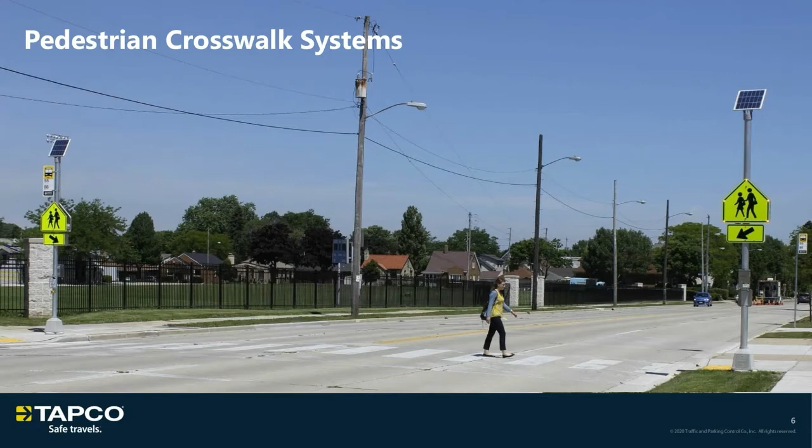To achieve this, we have many solutions. For the warning device piece of this, we offer traditional beacons in whatever configuration you prefer, blinker signs, which are LED edge-lit signs, or RRFBs, otherwise known as rectangular rapid flashing beacons. I found that Virginia and Maryland tend to favor the RRFBs as the go-to solution, while DC offers a tiered approach, starting with single-sided blinker signs, then going to double-sided RRFBs when the crossing is higher speeds or needs the extra attention. Each state really differs in their preferred warning method.

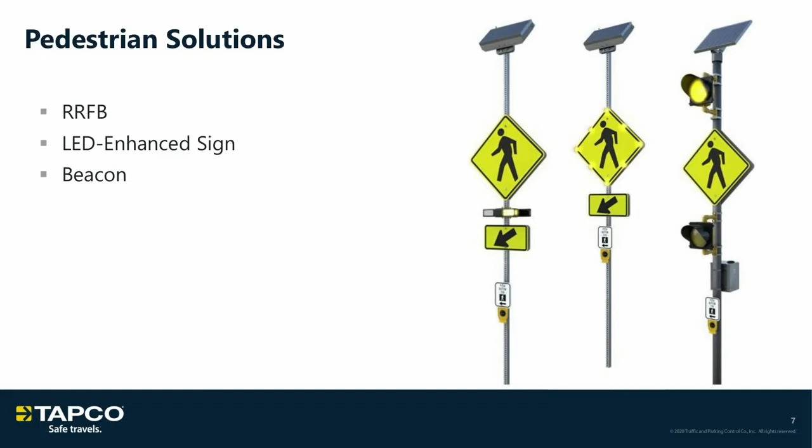As I mentioned, RRFBs tend to be the favored device, partially because of the attention-grabbing flash pattern. These have been proven to show yield rates by as much as 90%, are used nationwide, and meet the MUTCD interim approval IA21. They're required to be double-sided to create a gating effect for any two-way road. They are also required to be pedestrian activated, whether that be by a push button or passively.

Our TAPCO RRFB is dimmable so that it's bright enough to draw drivers' attention during the day, but not blinding them at night. It has an articulating bracket that allows you to perfectly aim the LEDs toward traffic. It's also easy to install in that we have put pedestrian indicator lights on both sides, along with pop-off covers so there's no worry about having it installed upside down and having the indicator pointing the wrong way.

TAPCO's blinker signs are MUTCD compliant. They're also dimmable for best effect for day-night conditions. This solution does not require it to be double-sided, so depending on solar size needed, it can be a lower cost solution. In studies, the blinker signs have proven to slow drivers down by 53%.

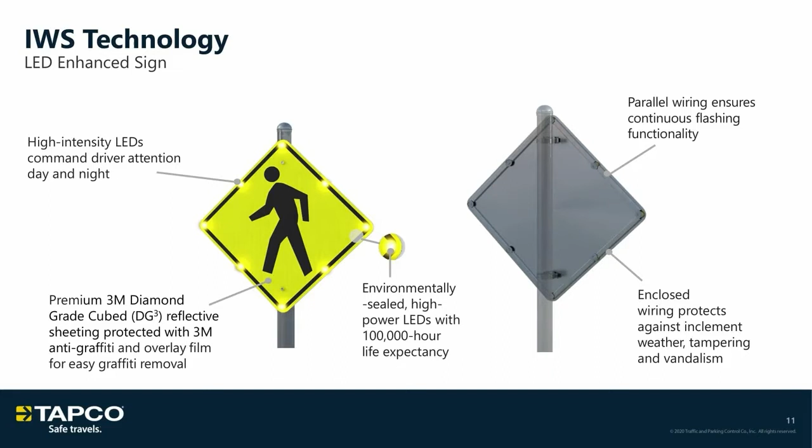Next, we come to flashing beacons. While these are most popular with school zone solutions and warning devices such as intersection ahead signs, etc., we still see quite a few of these paired with pedestrian crossings. They're MUTCD compliant and available in many configurations.

With the blinker beacons, we offer many different configurations, as I mentioned. They come in a single version, dual vertical, dual horizontal, or double-sided of any of these options. We also offer them in an 8-inch or 12-inch size, and also black and yellow housing. Our LEDs have a life expectancy of 100,000 hours and are the highest quality.

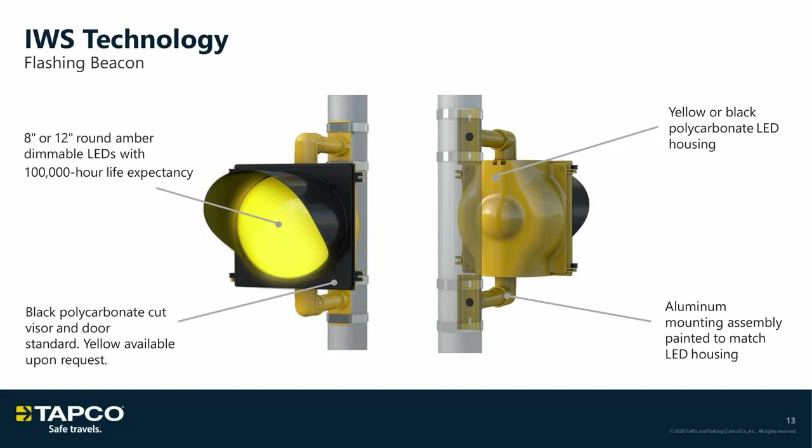Next, we'll go on to our activation types. After you've decided on the warning device, we have many activation types to choose from. I'll go over some of our most popular. They include the Bulldog push button, the INX or IDX push buttons, the Guardian push button bollards, wireless walk-through bollards, and FLIR passive detection.

The Bulldog push button is the most budget-friendly and has a light and chirping noise. This one is most commonly used with push button bollards as it has a low power draw.

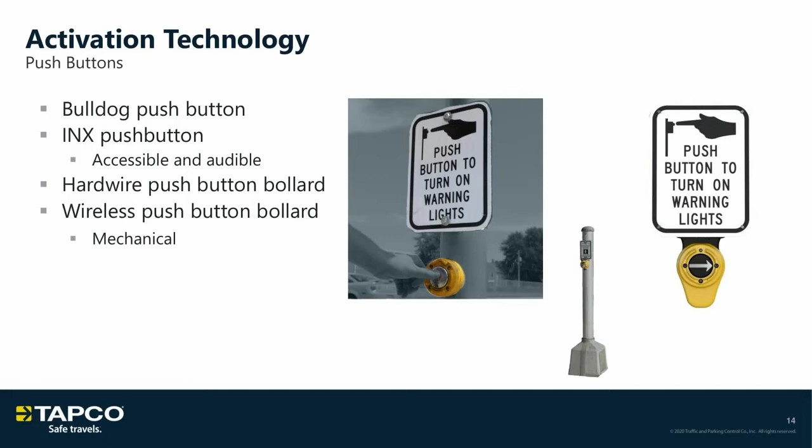The newest version of the MUTCD is pointing people towards using an APS button. We offer a few different APS buttons to choose from. One is the INX button by Polara. This button is replacing the XAV button as it's very similar except has some additional features. When this button is pushed, it has an audible message saying yellow lights are flashing, although on the Polara app, multiple commonly used messages are preloaded for your convenience. The button is able to be programmed via Bluetooth.

There's also another option, which is the IDX button, which is very similar, but you're able to either wave or press the button for touchless activation.

Jim will now tell us a little bit more about the Guardian push button and then go into FLIR thermal passive detection. So we're a partner with Campbell Company here in the Mid-Atlantic, so we have a lot of customers that use the Campbell APS. We like to use Campbell's APS where we can on RRFB systems and other crosswalks.

So what you see there is a picture of the Campbell APS Guardian, and it comes as a standard 5x7. In the upper right-hand corner, you can see that little plastic man logo sign. You can put the sign right on the APS, or in the upper left-hand corner that has a 9x12 sign plate, or you can have a 9x15 sign plate. There's also telescopic brackets available in 3 different sizes, which helps you get the push button away from the pole to help meet ADA requirements.

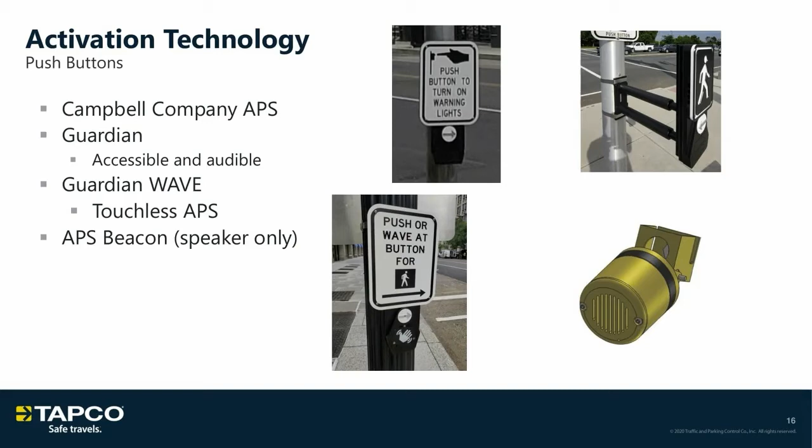Another popular way to activate these systems is with passive detection. A lot of agencies put in crosswalk treatments and then find out a month or two later that people aren't pressing the push button, so it doesn't do a whole lot of good. It's a good idea to decide early on to add passive detection, so there's a greater likelihood your treatment will be activated and you get the intended response from the motorist.

The system uses heat signatures and detects cyclists and pedestrians moving toward the crosswalk. It's not susceptible to shadows, tree shadows, road glare, or anything that could be problematic with other optical style cameras. The system is Wi-Fi configurable, and there are different ways to activate it — let me talk about that on the next slide.

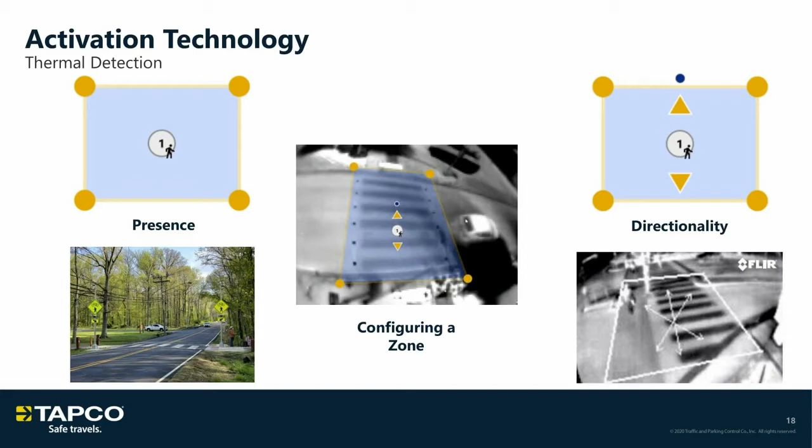Next we'll talk about our walk-through bollards. These use dual infrared beams, and once the beam is broken, it radios over to the warning device to flash. They can be either hardwired or battery operated, and they're great for bike trails since you can offset them a little ways back to flash the crossing ahead of time before the biker actually reaches it.

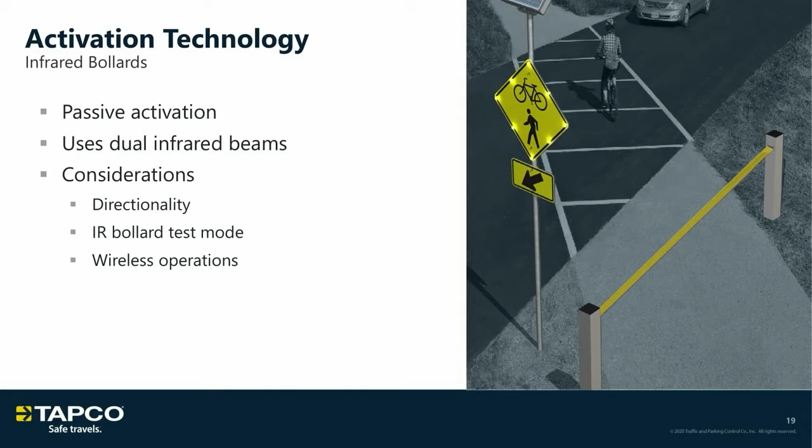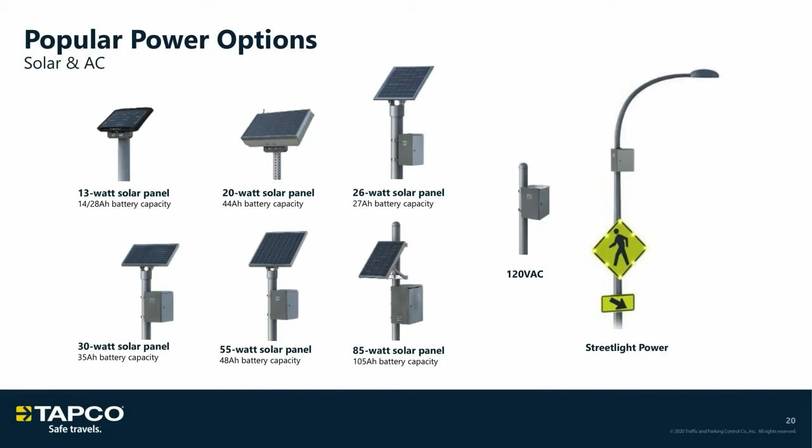So how do you know what solar size to use? There are many options giving different levels of autonomy. One TAPCO advantage is that any municipality or DOT can give us their desired autonomy requirements, and we can build the system to meet those. In DC, for instance, they want all RRFBs to run for 30 days minimum without sun, and we're able to easily meet that requirement using an oversized solar panel.

Jim, if you want to go ahead and add some of your insights in there. Sure. Yeah, we can hear you. Sure, you can hear me this time.

Okay, good. Okay, so

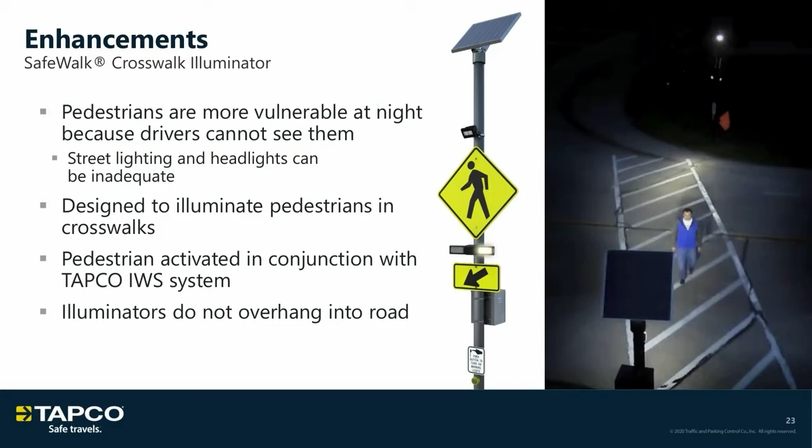The SafeWalk illuminator is unobtrusive, has a two light section to maximize its effectiveness, and is adjustable. It exceeds the FHWA's recommendation of 20 lux and is designed to illuminate one lane of traffic per device. So it's optimal to have two SafeWalks for a 2-lane road, one on each pole. The SafeWalk has a photo cell, so it's only activated when the warning device is activated and it's dark outside.

One thing to be mindful of is if the device is in a highly shaded area, it may be tricked into thinking it's dark and come on during the day. This device can be added to new or existing systems. You'd want to be mindful that there's enough power if it's solar. It pairs most commonly with the 55-watt system.

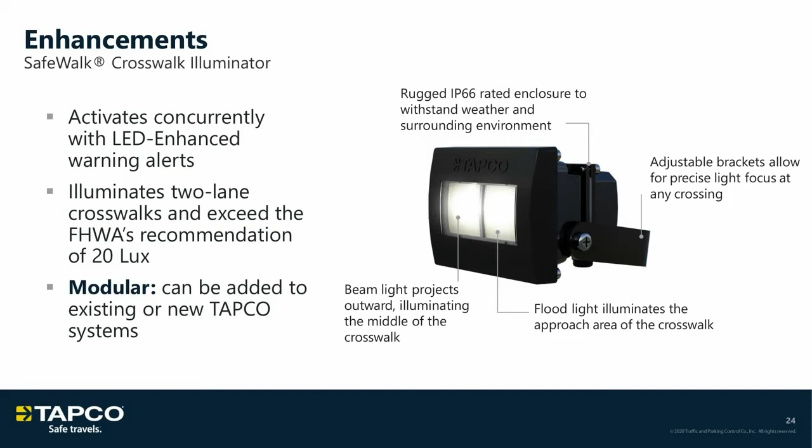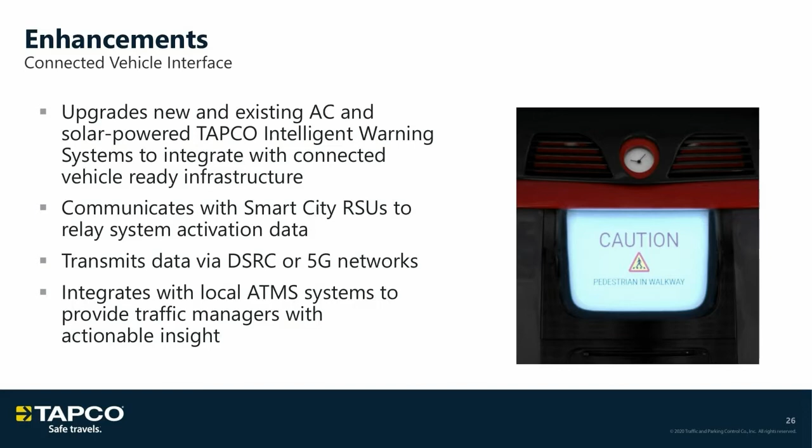The roadside unit has direct short-range communication to connected vehicles in the area. It also has GPS time and location. When a connected vehicle is traveling through the CVI and a TAPCO system is activated, it sends a message such as pedestrian ahead to connected vehicles close by to give that driver added warning.

further. Sounds good. Yeah, no problem. We can hear you, Jim. You got a problem before. All right, great.

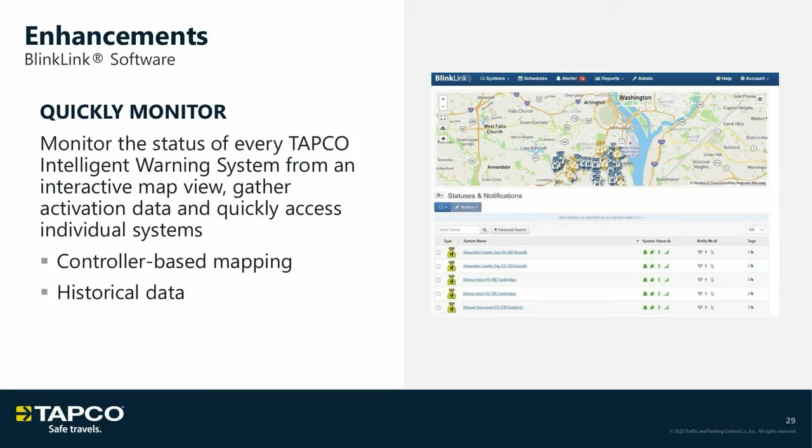So you can have snow days or closures and 2-hour delays ready to go. And if you wake up that morning and the school board has said it's a 2-hour delay, somebody from the agency can just log in and quickly program all the school's clocks to be on a 2-hour delay, so that when the students are out there 2 hours later, they get the benefit of the beacons warning motorists to slow down during school hours.

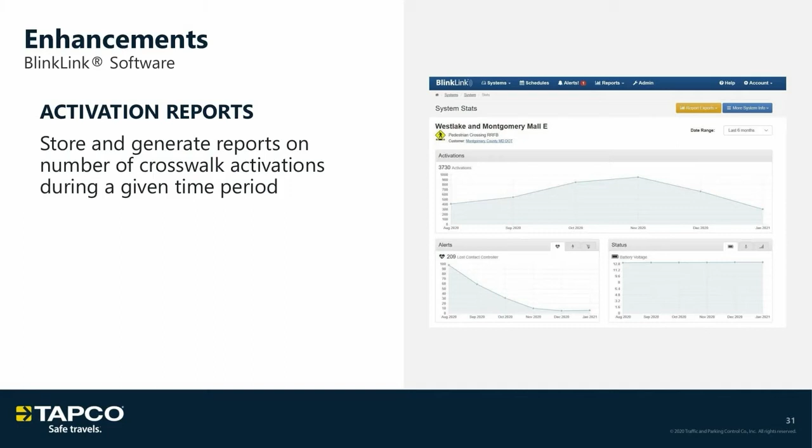There's other types of data that can be looked at. You can see the history of the battery voltage, the history of the temperature of the unit, when it may have lost contact. And another application could be alerts.

So you can have technicians that are assigned to certain crosswalks or certain school zones. And if there is an alert like low battery, indicating you've got a problem with the battery or the solar power, before the unit actually dies it will send you an email basically saying, come check me out, I've got a problem. That could be an email alert or a text message, or both, to whatever technician might be assigned to that location.

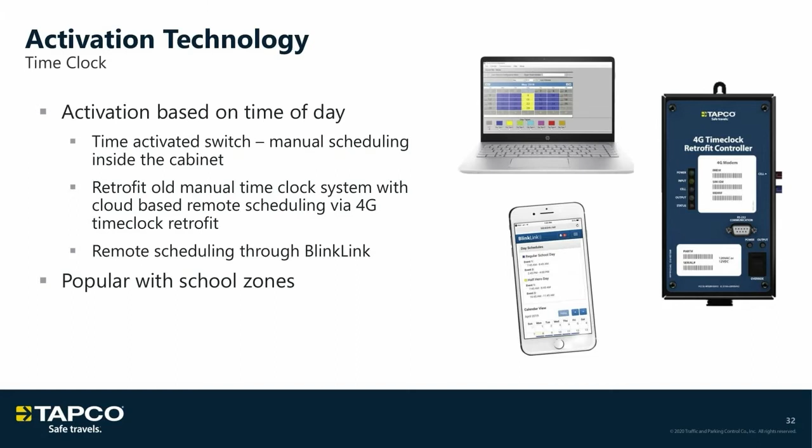Solutions to meet your needs. Probably the most popular would be the dual vertical beacons, although we also see requests for dual horizontal beacons or school zone signs with embedded 8-inch beacons set in the sign. We also offer school zone blinker signs as well as combos of either school speed limit blinker signs paired with radar feedback signs, or blinker beacons paired with school speed limit signs and radar feedbacks. These options provide the ultimate in awareness.

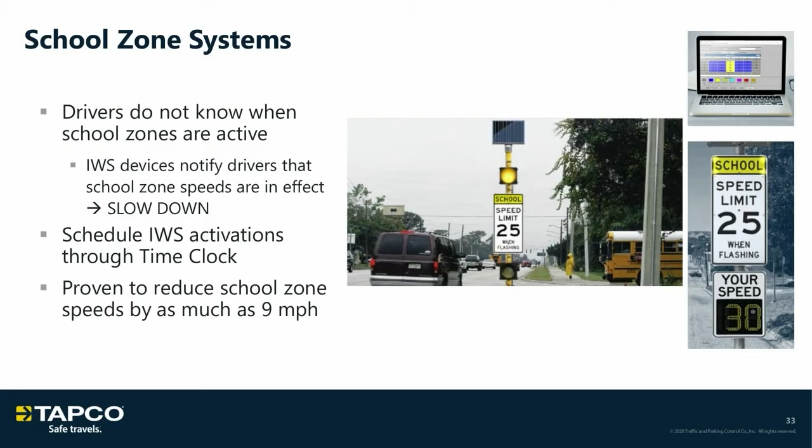We also offer a wide variety of radar feedback sign options on their own. You have the option of getting them with white, yellow, fluorescent yellow green, or work zone orange colored faces. We offer either the Evolution or Safe Pace series. The Evolution line comes with 1 year of free cloud for data management of your signs. The cloud does have a yearly fee, but you're able to cancel at any time and still be able to use the Bluetooth function to collect data. These signs come in a wide variety of power options. AC is great for those areas that already have power and plan to have the sign be permanent.

I see the battery powered option most commonly used by police departments wanting to move the sign around. The batteries are rechargeable, and depending on how much is activated, could have about a 2-week life before needing to be recharged. Then we also carry the solar option.

All of these signs come with a violator strobe alert, which can be programmed to go off at certain speeds. We have options for standard or full matrix models if you want custom messages such as slow down or too fast. There's one strategically placed on my way to work that catches me daydreaming every once in a while. It is a real attention grabber.

Jim, do you want to add anything else to this and then talk about some of our unique configurations?

Yeah, sure. So it's funny with these driver feedback signs, one thing you can definitely do is limit the speed that's posted on the sign, because apparently some people will try to go through the sign and get a high score. So you can turn it off at 65 or 70, or whatever the high speed might be, so people don't try to do that.

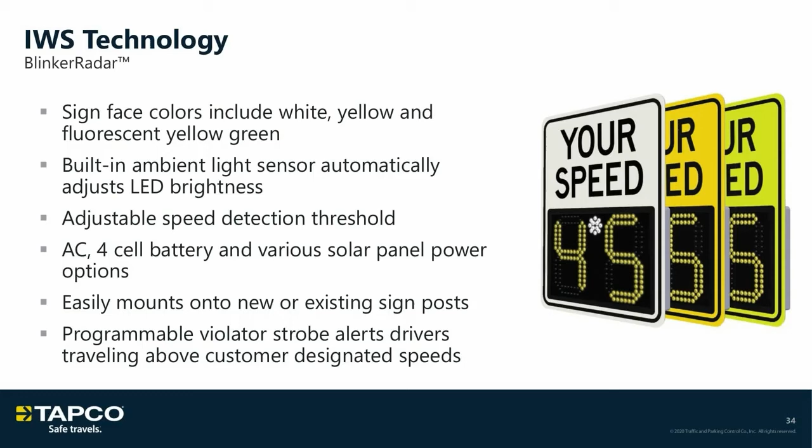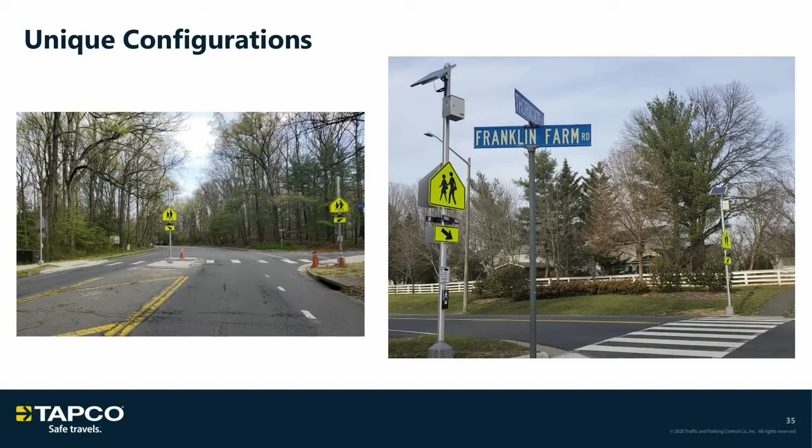The examples you see here, on the right and on the left, the idea with the RFBs is to create a gating effect for the driver. You should see the beacons on both the right and left side of the roadway. On a bidirectional roadway with no median, you'd see one on either side of the street. If there's a median and a third pole, then each edge of the roadway might have just one RFB that faces traffic, and the median pole would be bidirectional, which still creates that gating effect. Both of these happen to be in school zone areas, so we can use that S1-1 school zone sign as well.

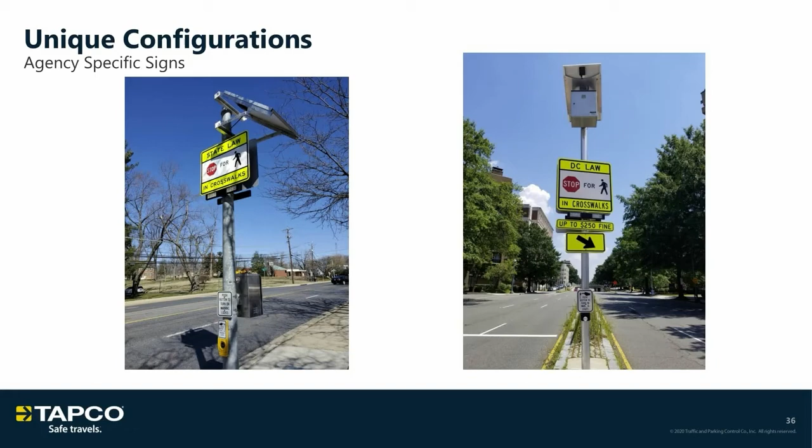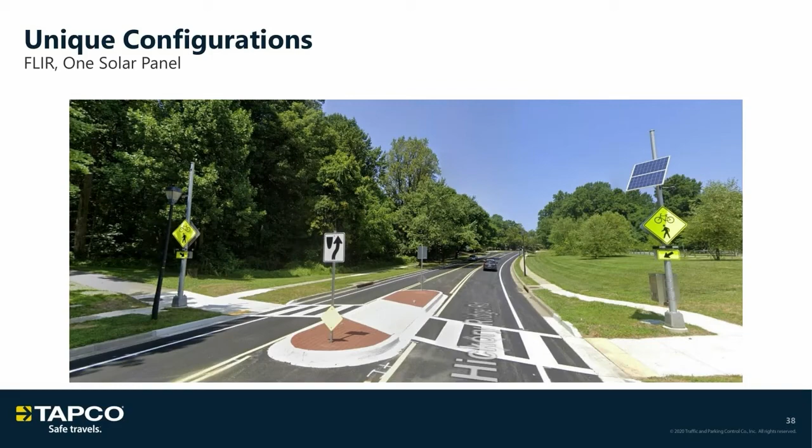And this is on the Capital Crescent Trail, pretty heavily used. In this case, there's no push button to activate the system. They're using the FLIR passive detector to activate the system on the curbside. The system will activate for 20 seconds or whatever the duration was set to. The other thing about this crosswalk is that the APS beacon is used, the speaker, so that it enunciates yellow lights are flashing, wait for gap, to the pedestrian or cyclist when they approach the curbside.

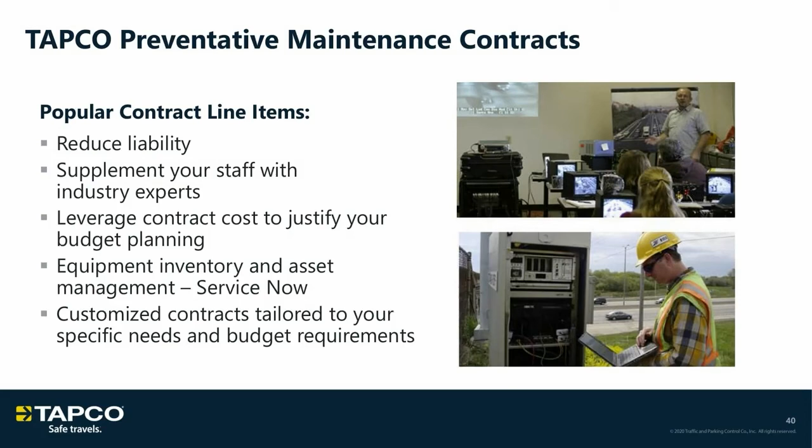TAPCO is a vendor under the Omnia Partners Cooperative Purchasing Contract. Omnia is the nation's largest and most experienced cooperative purchasing organization for public sector procurement. They work with over 90,000 cities, municipalities, and state agencies. I find that a lot of time municipalities don't even know that they're signed up to use this contract, as they may only use it with one vendor that's under the contract.

There's a huge umbrella of people, including Home Depot, Cintas, Club Car. We're happy to look you up to see if you are a member and get you connected with an Omnia Partners program manager to answer those in-depth procurement questions regarding the contract and help you through this process.

TAPCO's Omnia contract was just awarded in March of 2020 for a 5-year term with 5 one-year extensions. The lead agency this was bid under is Barron County, Wisconsin. The contract was publicly competitively bid and won, so allows you to forego getting 3 quotes or going out to formal bid. TAPCO offers competitive pricing under this contract along with free freight.

Control Tech, being an exclusive dealer for TAPCO, is authorized to be able to piggyback off the contract to extend these benefits to you. We're happy to direct you and your procurement office to TAPCO's landing page on the Omnia site, where it lists them as being an authorized dealer.